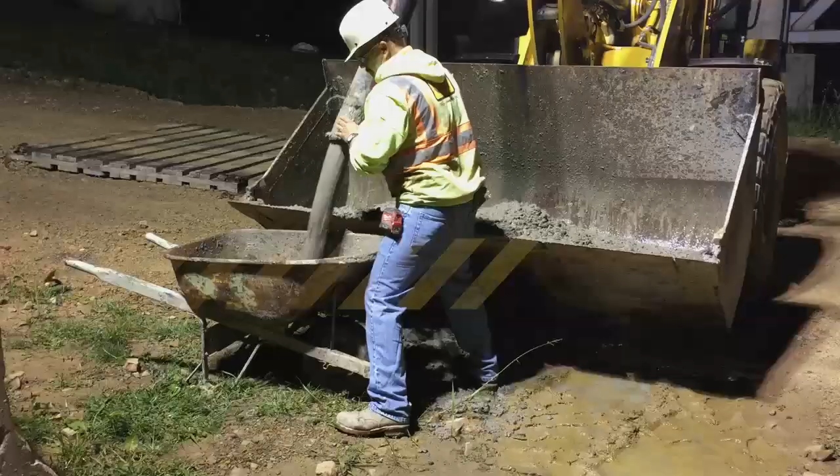The operations presented in this video are meant to be instructional to ensure quality construction. This video is not intended to provide a comprehensive overview of safety procedures. All parties should ensure that they are familiar with and follow all safety requirements, policies, and procedures that apply to their specific operation.

While many factors play a role in final bridge deck construction, this video training series will cover bridge deck placement with a pump and the initial concrete testing for Class AAAP concrete. We will begin after the bridge deck pre-placement activities have been completed.

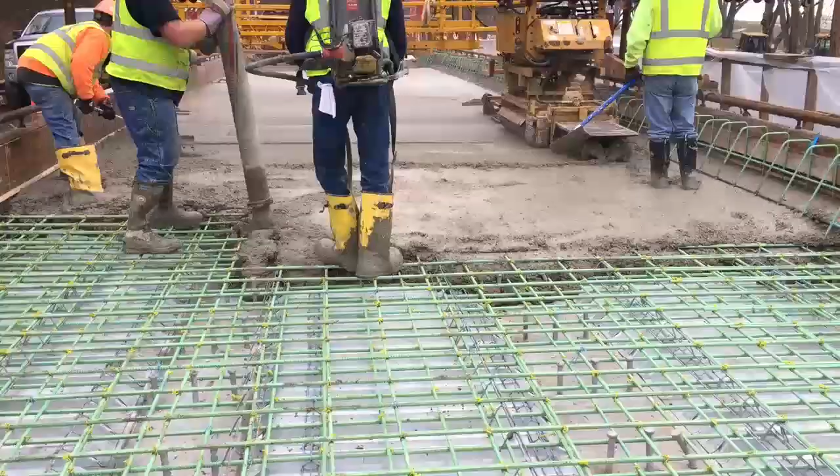This video is intended to provide some basic understanding of the items important during the construction of quality reinforced concrete bridge decks cast in place, with focus on the concrete testing for quality control and acceptance for bridge deck placement operations using the pump truck method type of placement.

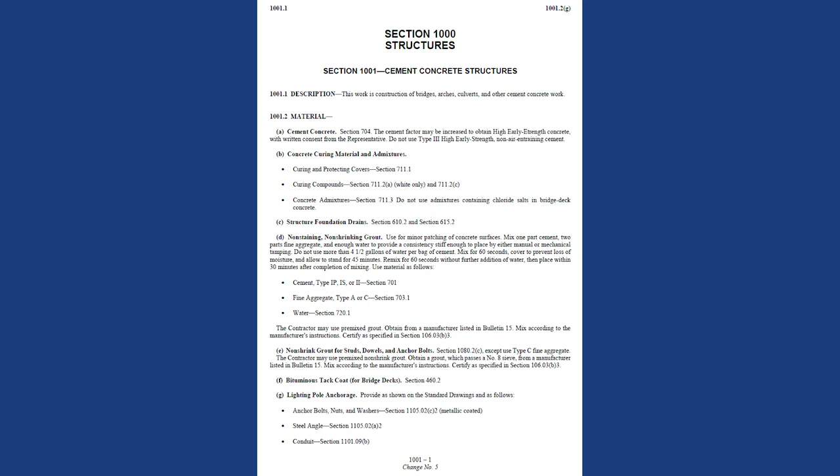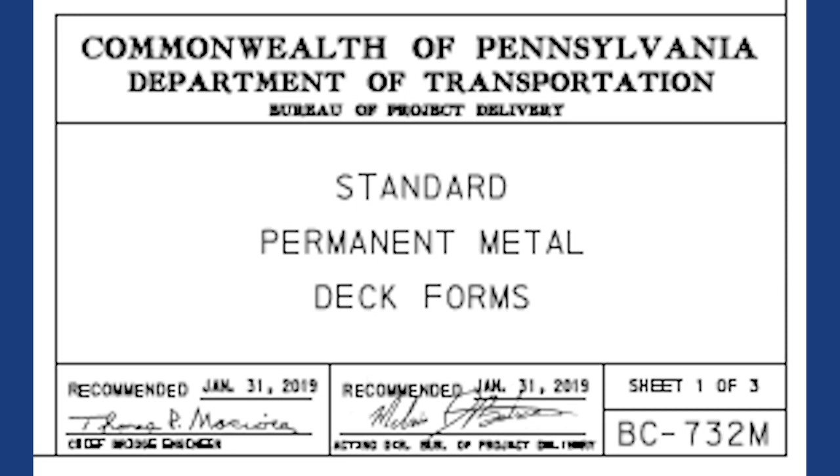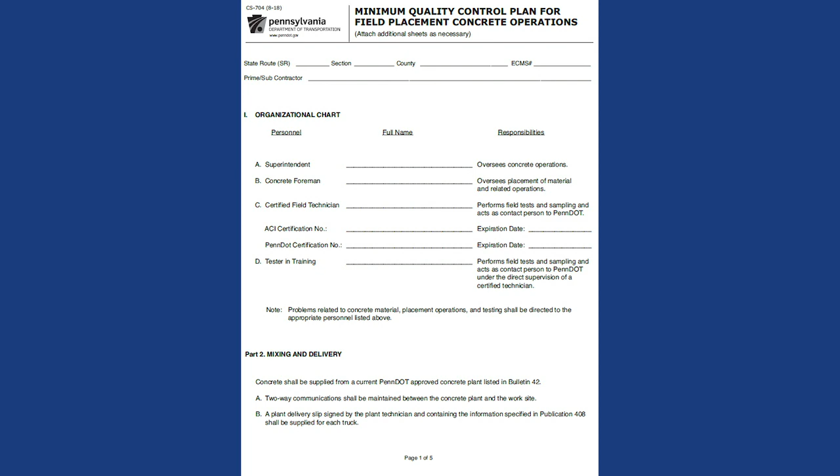The applicable documents needed for bridge deck construction testing and placement by the pump truck method are Publication 408, Section 1001, Cement Concrete Structures. Publication 408, Section 704, Cement Concrete. BC Standards 732M, Permanent Metal Deck Forms. BC Standards 752M, Concrete Deck Details. Approved Contract Structural Plans. Approved CS 704 Minimum Quality Control Plan for Field Placement Concrete Operations.

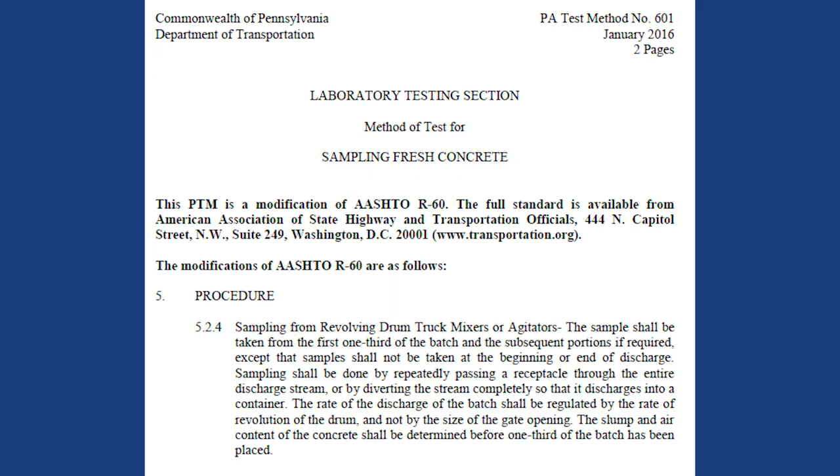Approved Bridge Deck Placement Plan. Approved Concrete Mix Design Class AAAP. PTM number 601, Obtaining Samples of Fresh Concrete. AASHTO T119 Slump Test. AASHTO T152 Air Content Test. ASTM C1064 Temperature Test. And Concrete Field Testing Technician Certification Training Manual.

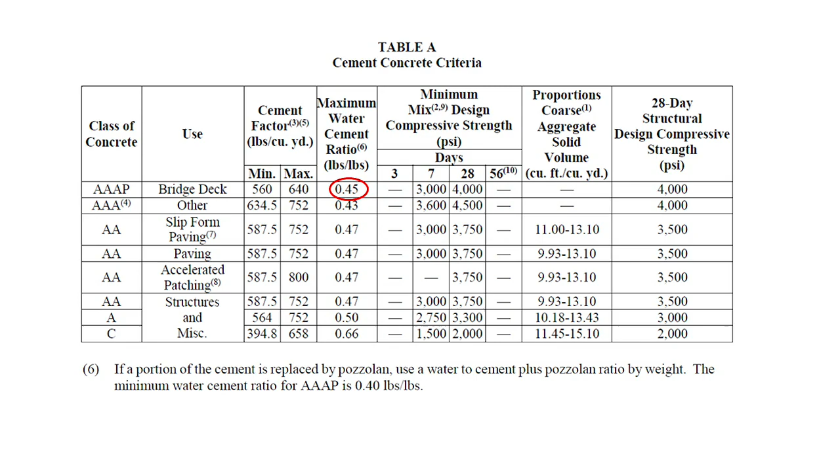The concrete type to be used for all bridge decks is Class AAAP. AAAP bridge deck concrete requires a 7-day minimum compressive strength of 3,000 psi and a minimum 28-day compressive strength of 4,000 psi. AAAP requires a minimum water-to-cement ratio of 0.40 pounds per pound and a maximum water-to-cement ratio of 0.45 pounds per pound. AAAP has a maximum upper slump limit of 5 inches.

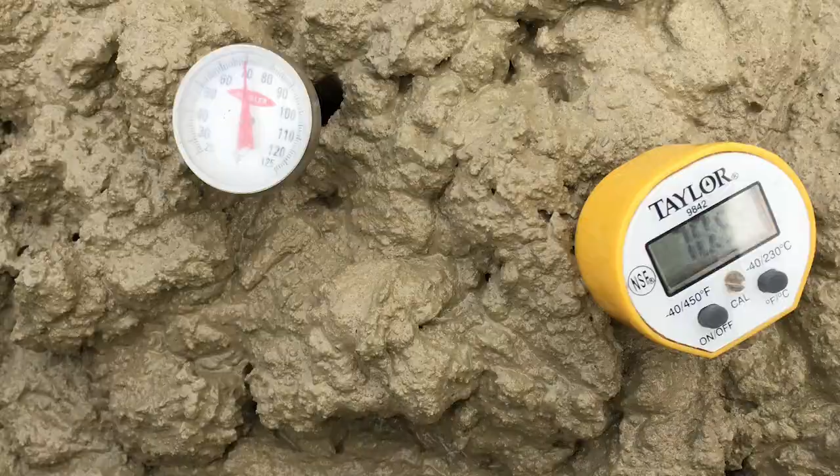The concrete temperature after mixing and prior to deck placement is to be between 50 degrees Fahrenheit and 80 degrees Fahrenheit. Special retarding and/or water-reducing admixtures are often used in the AAAP deck mix to control rapid drying of the concrete due to low humidity, wind, high ambient air temperature, and the concrete's set time to allow for proper finishing and curing. The following are the concrete test types that may be encountered for bridge decks.

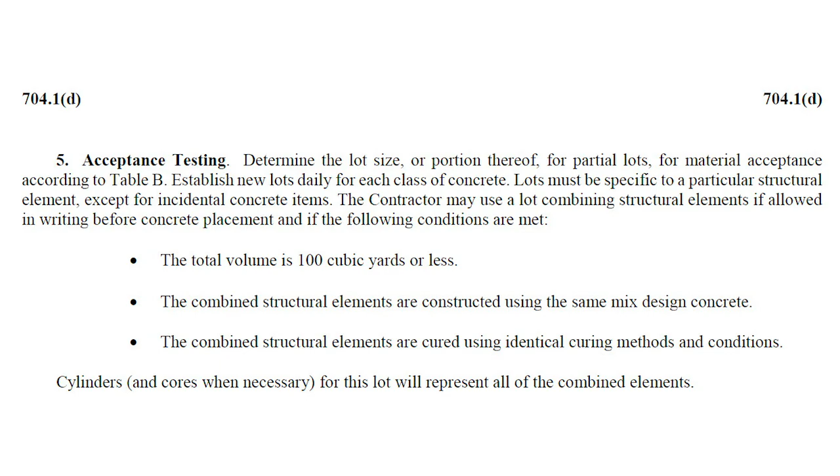Acceptance testing. The department's overall concrete acceptance process includes a combination of quality control, acceptance, verification, and quality assurance sampling and testing. Lot sizes are established by the department for the appropriate type of construction being performed as per Section 704, Table B of Publication 408. Acceptance samples will be obtained and tested by the contractor, witnessed by the department representative.

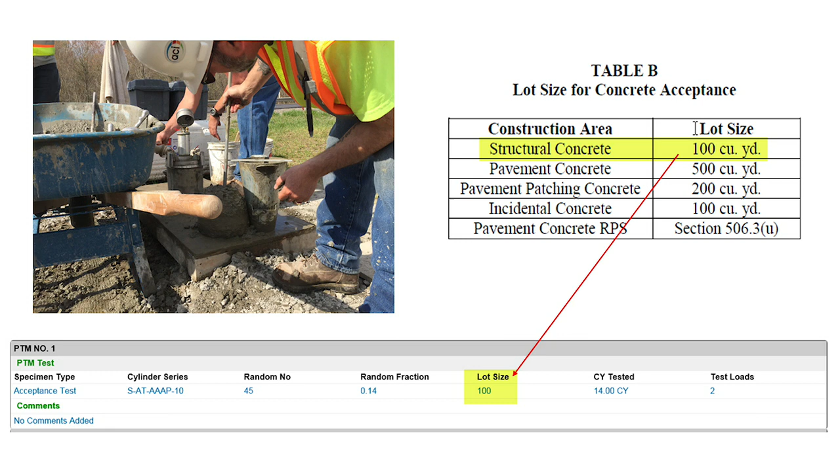For example, if a bridge deck is being placed, reference Table B, which indicates the construction area would be structural concrete requiring a 100 cubic yard lot size. These acceptance lots are established daily and do not continue from one day to the next. Quality control testing. To be performed by the contractor's concrete field testing technician for slump, air content, and temperature, as noted in the approved quality control plan and Publication 408, Section 704.1.

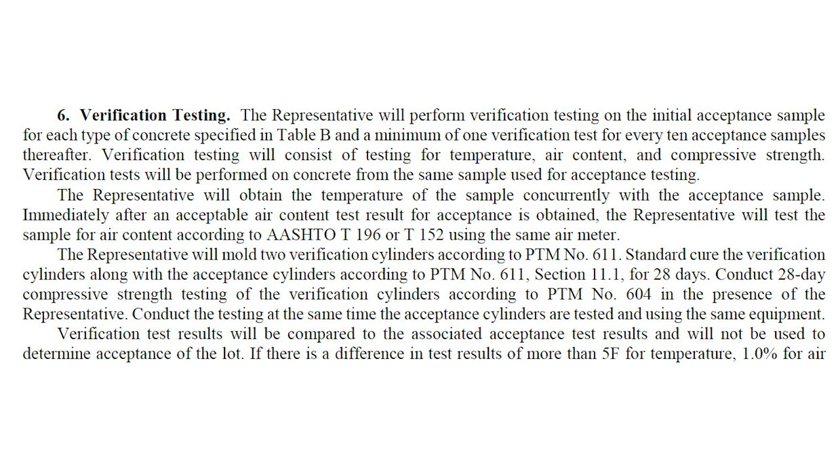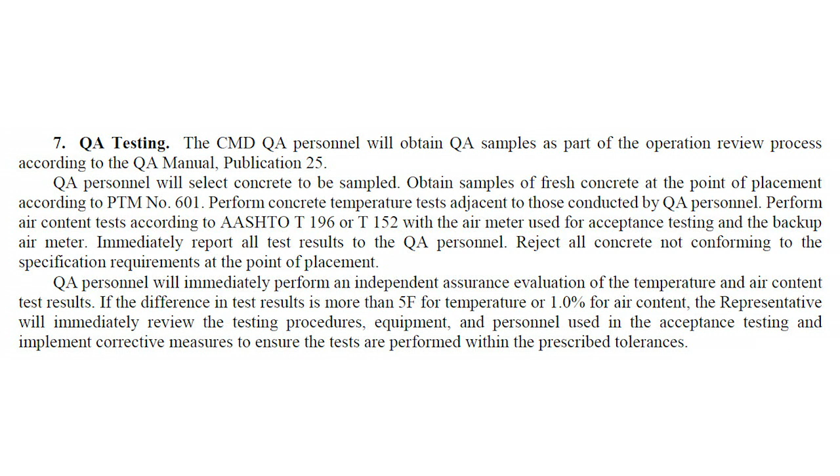Verification testing. To be performed by the department representative from the same sample of material obtained for the initial acceptance sample, which shall be tested for air content and temperature as per Section 704.1 of Publication 408. Quality assurance testing. When required, to be performed by the contractor's concrete field testing technician for slump, air content, temperature, and witnessed by QA representative as per Publication 408, Section 704.1.

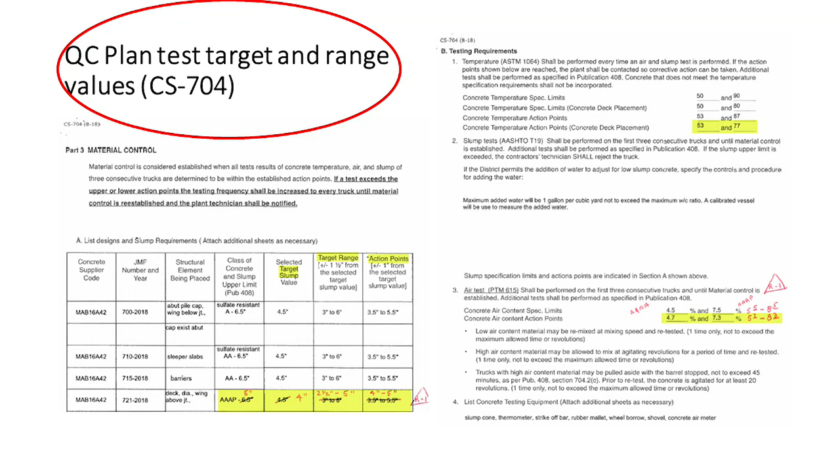A certified concrete field testing technician is required for the testing of concrete in the plastic and hardened state. The concrete field technician must be knowledgeable of the requirements of the department reviewed and approved quality control plan during the testing, and must be aware of the test target and range values for slump, temperature, and plastic air content of the Class AAAP mix being placed.

Quality control testing must be performed until material control for the AAAP is achieved. Material control is considered established when all test results of concrete temperature, air content, and slump of 3 consecutive trucks are determined to be within the established action points. Do not establish action points for slump at either the upper or lower specification limits.

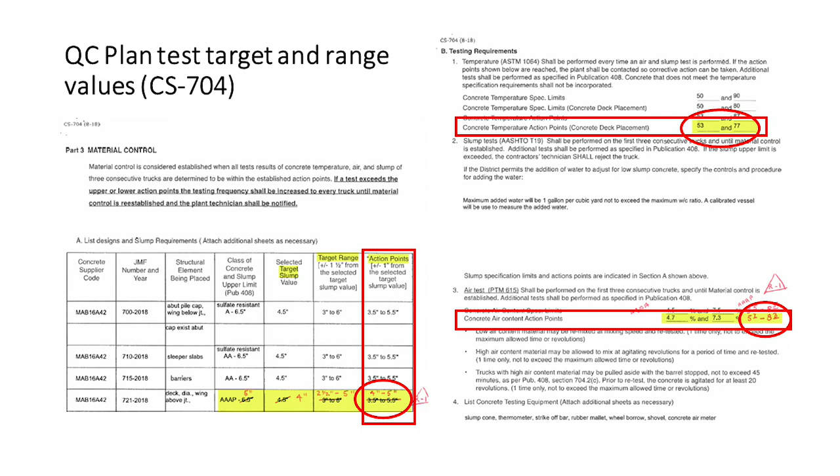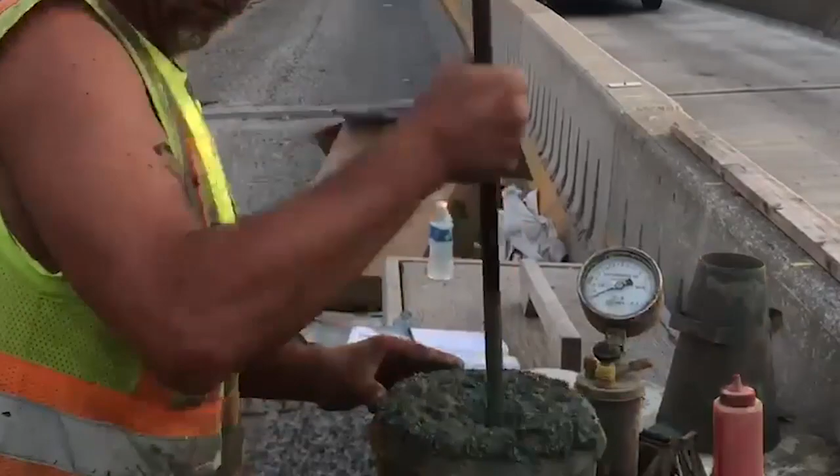If a quality control or acceptance test exceeds the upper or lower action points, the testing frequency shall be increased to every truck until material control is reestablished and the plant technician shall be notified. Perform sampling of the concrete Class AAAP mix in accordance with PTM number 601 of Publication 19, Obtaining Samples of Fresh Concrete. Sample to be obtained from the first 1/3 of the batch and subsequent points when required.

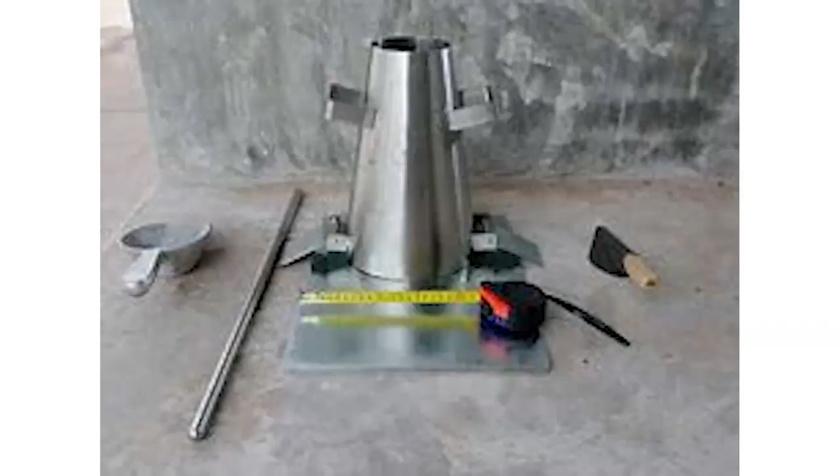Perform plastic air content testing in accordance with AASHTO T152. Perform slump testing in accordance with AASHTO T119. Perform temperature testing in accordance with ASTM C1064. The testing facilities and equipment are to be provided by the contractor or producer as outlined in Section 704.1 of Publication 408.

Slump test requirements for bridge decks. Perform slump testing in accordance with AASHTO T119 as follows. Concrete consistency at the time of deck placement is to be maintained within 1.5 inches of the selected target slump value noted on the approved quality control plan. If the upper slump limit of 5 inches for AAAP is exceeded on any slump test, the certified concrete field testing technician shall reject the concrete load.

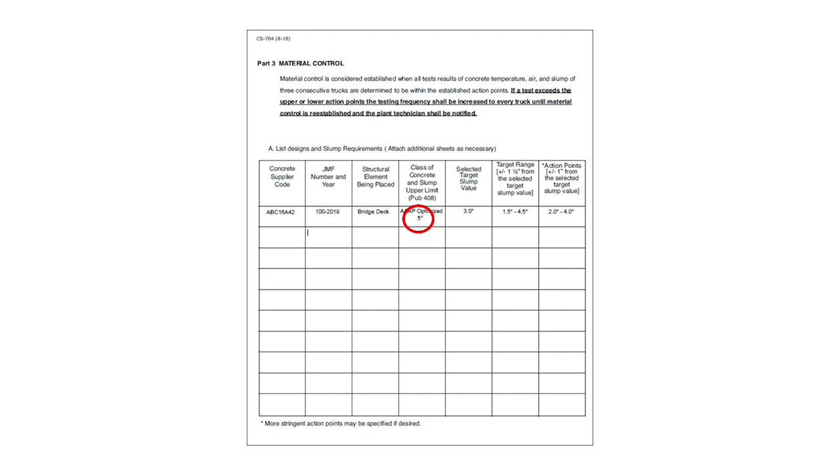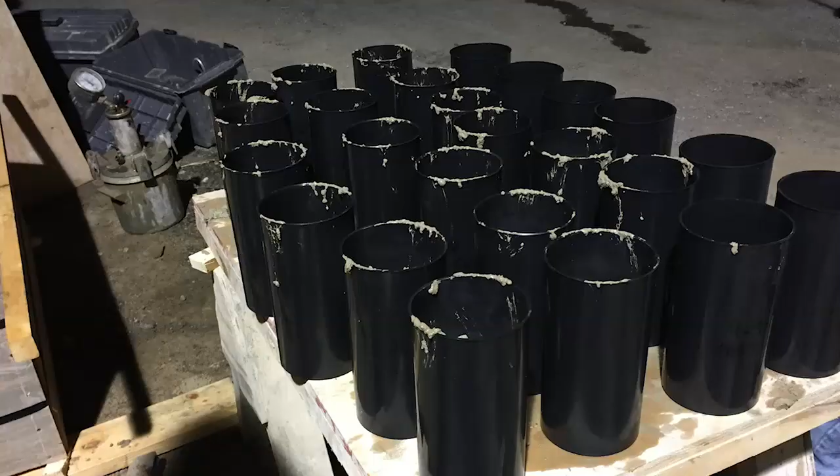If any slump test result falls outside the target range noted on the approved quality control plan, and has not exceeded the upper slump limit of 5 inches for AAAP, immediately perform the air content and temperature tests from the same sample. If the air content and concrete temperature tests are within the specified limits, the contractor may incorporate the material into the work, provided a full set of quality control and acceptance compressive cylinders are molded in addition to the cylinders made for the originally selected PTM number 1 acceptance sample location for compressive strength testing.

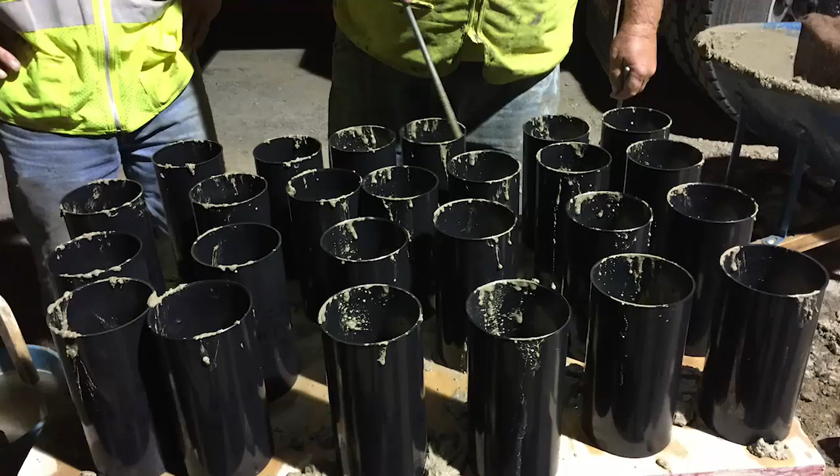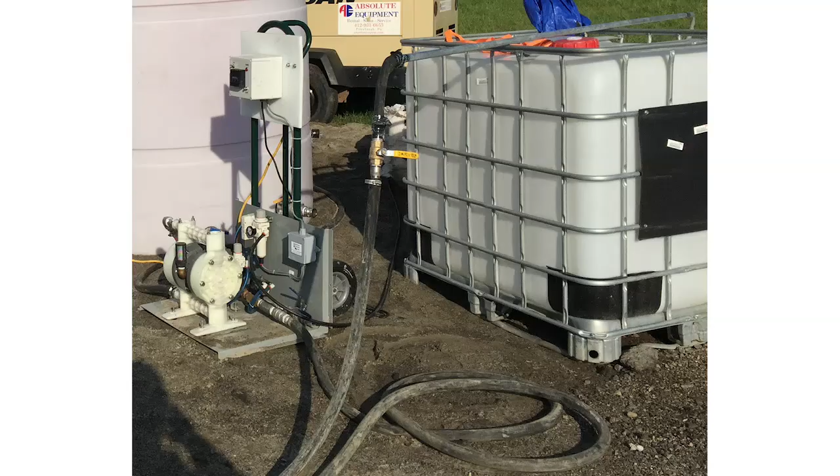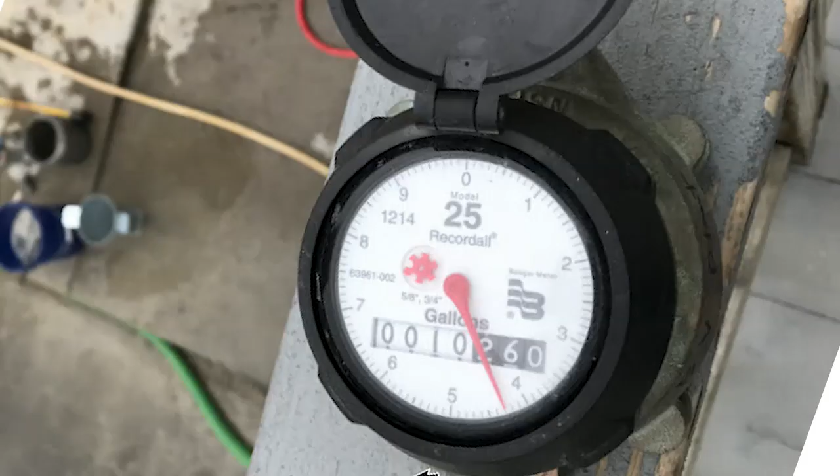If one or more truckloads of cement concrete exceed the slump target range, make additional quality control and acceptance cylinders from each load. Use the lowest compressive strength cylinder result for acceptance of the lot. The adjustment of slump may be allowed through the addition of additional water reducer admixture at the job site, provided a comprehensive procedure detailed in the quality control plan has been submitted and approved for this purpose. The addition of water to adjust for slump, when permitted, must be from a metered system.

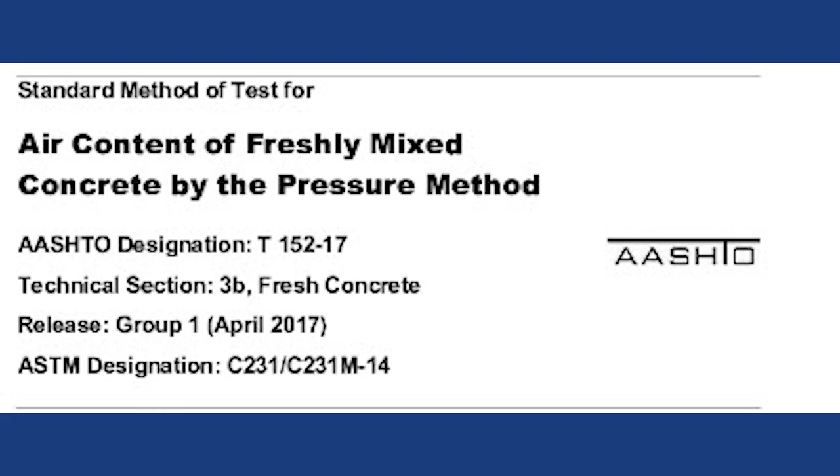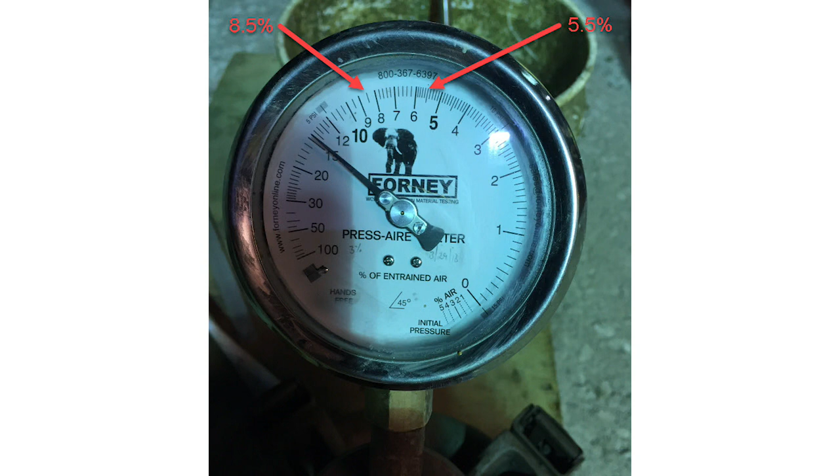Air content testing for bridge decks. Perform plastic air content testing in accordance with AASHTO T152 and as follows. AAAP concrete mixes are to have a plastic air content of 7.0% plus or minus 1.5%, which is a range of 5.5% to 8.5%. 2 sets of calibrated air meters are to be available at each concrete placement on the project, with 1 set as a backup.

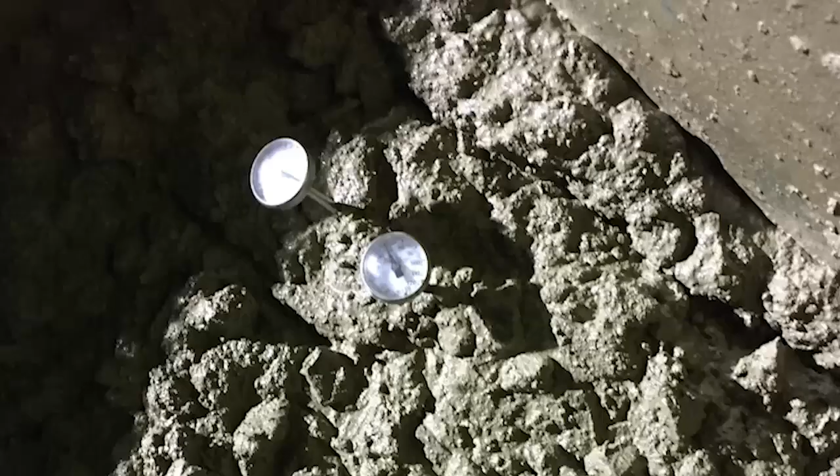Concrete temperature testing for bridge decks. Perform temperature testing in accordance with ASTM C1064 and as follows. The plastic AAAP concrete temperature for bridge deck placement must be between 50 degrees Fahrenheit and 80 degrees Fahrenheit. Have a minimum of 2 concrete thermometers available for use during temperature testing.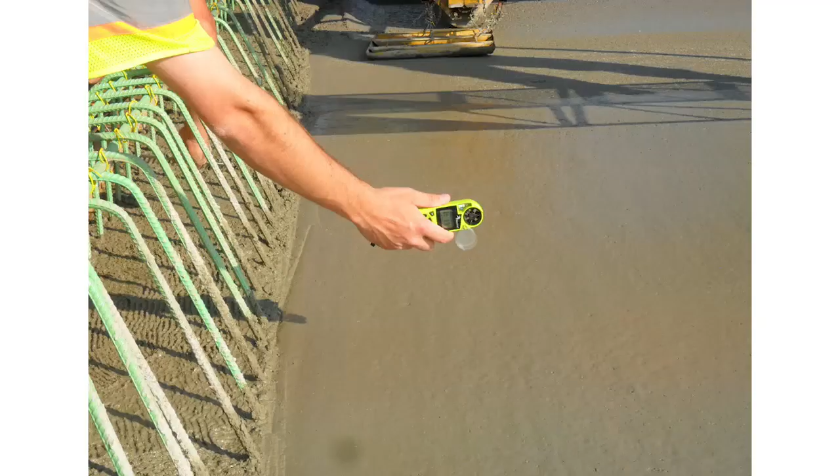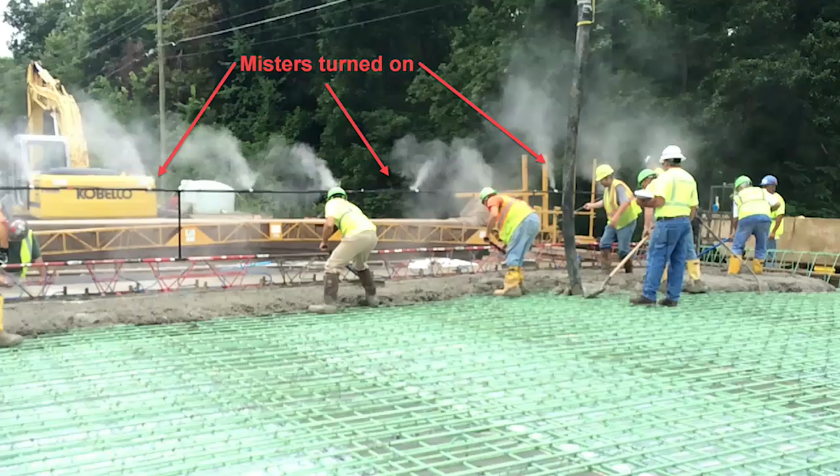Evaporation rates for bridge decks, as per Publication 408, Section 1001.3. Do not exceed an evaporation rate of 0.06 pounds per square foot per hour before starting the deck placement and every hour during the placement. If the evaporation rate value is exceeded, stop the concrete deck placement until protective measures are taken to reduce values to an acceptable level.

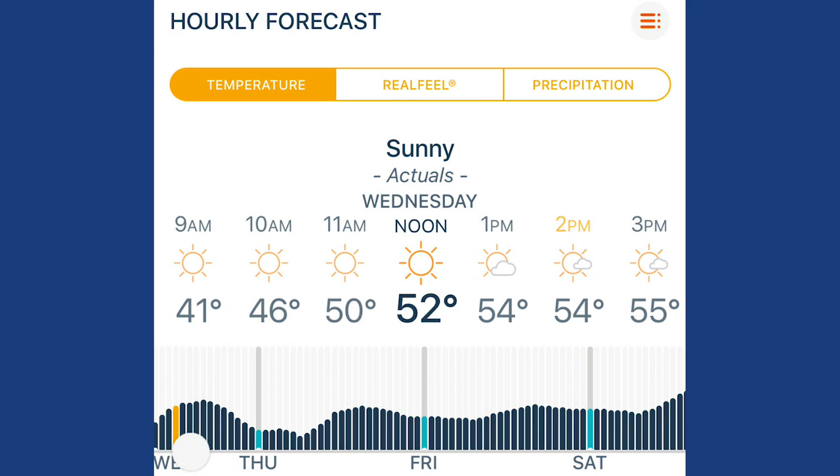Ambient conditions during bridge deck placement, as per Publication 408, Section 1001.3. Do not proceed with mixing and placement operations if the forecasted ambient temperature is expected to reach 80 degrees Fahrenheit within the scheduled placement time, or if the evaporation rate will exceed 0.06 pounds per square foot per hour. Unless otherwise authorized in writing by the department, do not start the deck placement operation until the ambient air temperature is a minimum of 40 degrees Fahrenheit and rising, and is predicted to stay above 40 degrees Fahrenheit throughout the entire deck placement operation.

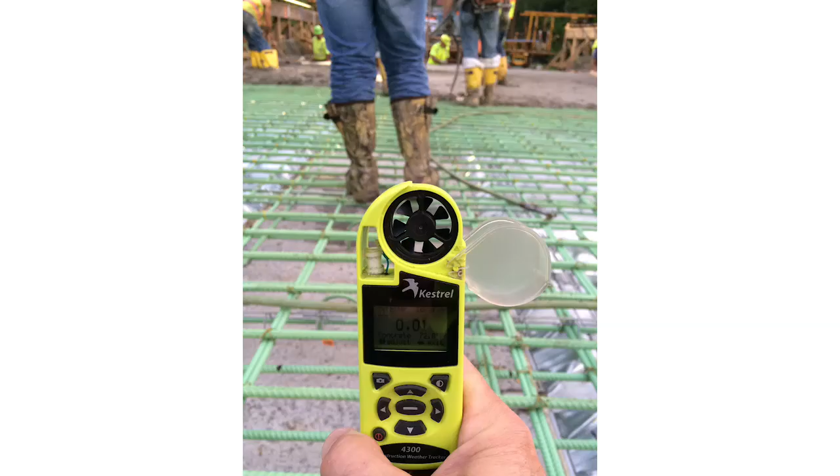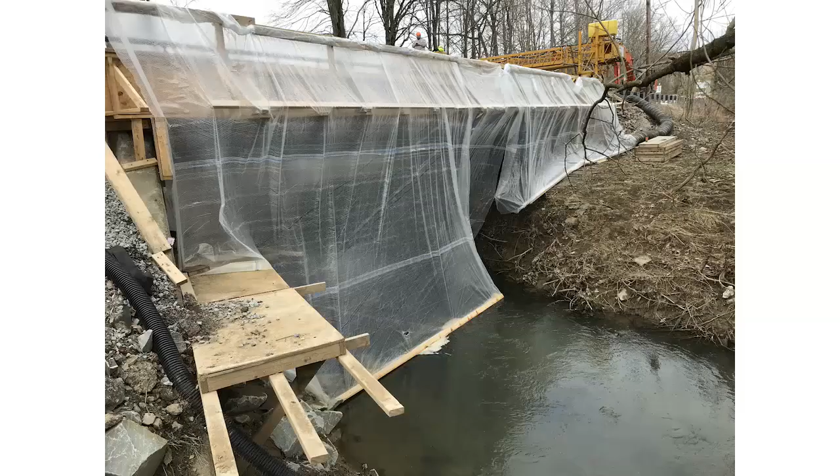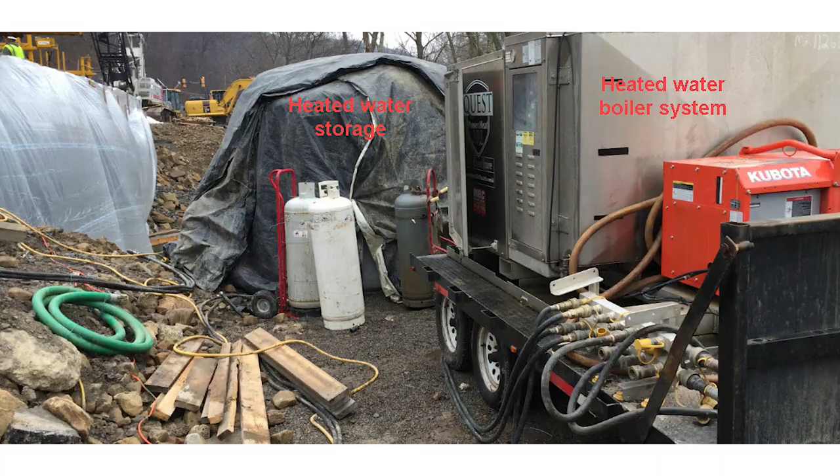Do not exceed the evaporation rate of 0.06 pounds per square foot per hour prior to and during the bridge deck concrete placement operation. Cool weather is defined in Publication 408 as when concrete is placed at an air temperature below 50 degrees Fahrenheit but above 35 degrees Fahrenheit. Cold weather is defined in Publication 408 as when concrete is placed at an air temperature below 35 degrees Fahrenheit. It is important here to be aware of the forecasted weather on the date of the scheduled deck placement, as this will be a deciding factor on proceeding with the placement or postponing or canceling for another day.

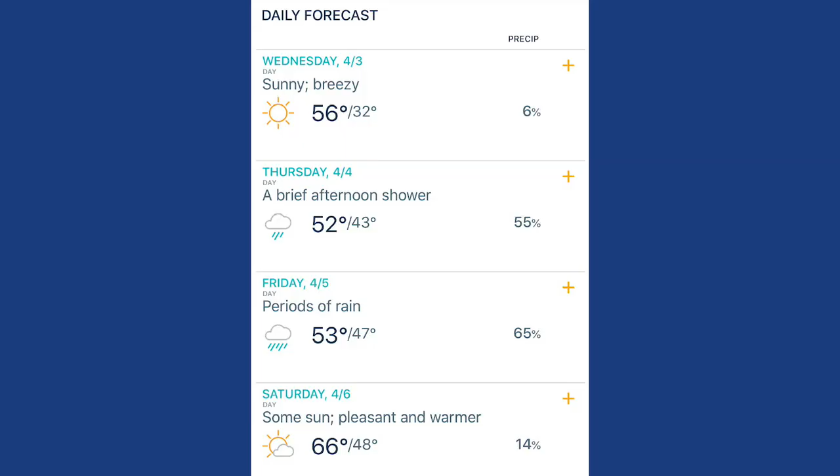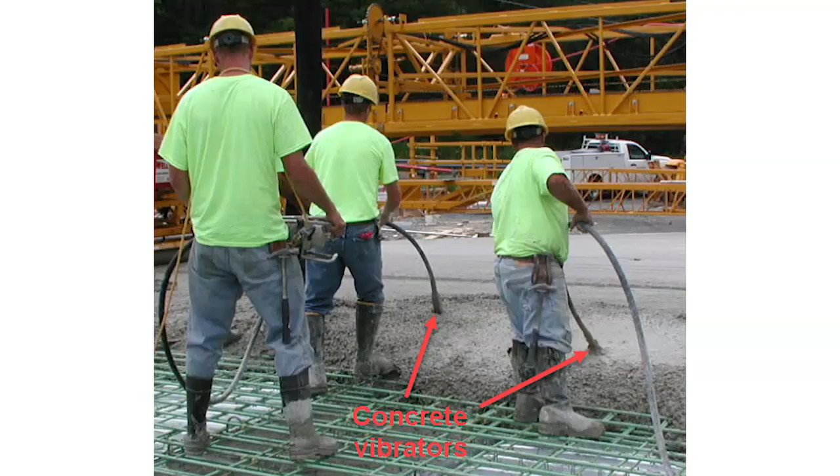Equipment used for concrete bridge deck placement. Concrete placement equipment may include or combine either a pump truck, crane, and bucket, or conveyors, such as a telebelt, to place the Class AAAP concrete deck mix that has been delivered from the concrete supplier delivery trucks. Concrete vibrators are important for proper consolidation of the AAAP concrete around the reinforcement steel and formwork during placement, and should take place ahead of the Bidwell finishing machine.

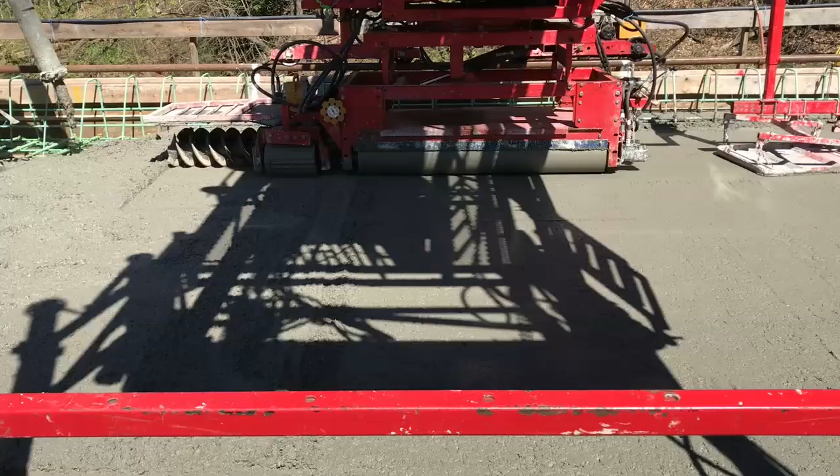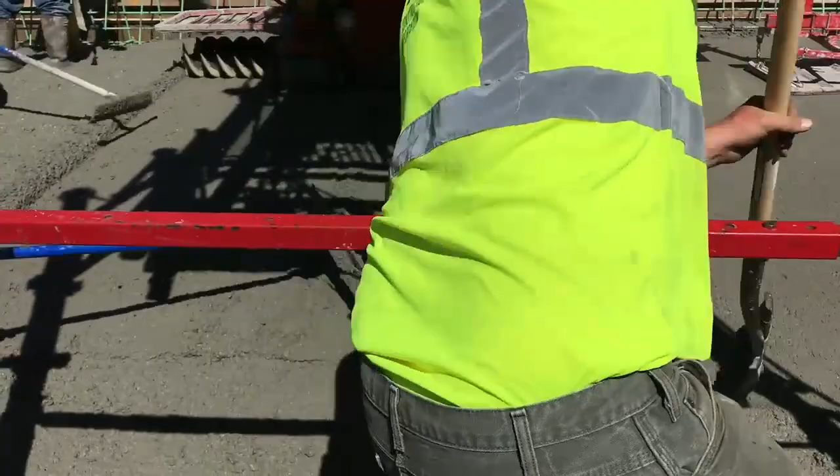A concrete Bidwell finishing machine is most widely used for most bridge deck placements. It is used for the initial concrete strike-off and consolidation of the as-placed concrete and for final design grade control of the plan deck elevation grades. The use of a Bidwell machine must include a backup machine and/or motor and spare parts in case of breakdown. A water fogging system is required in case of evaporation rates being exceeded during the deck placement.

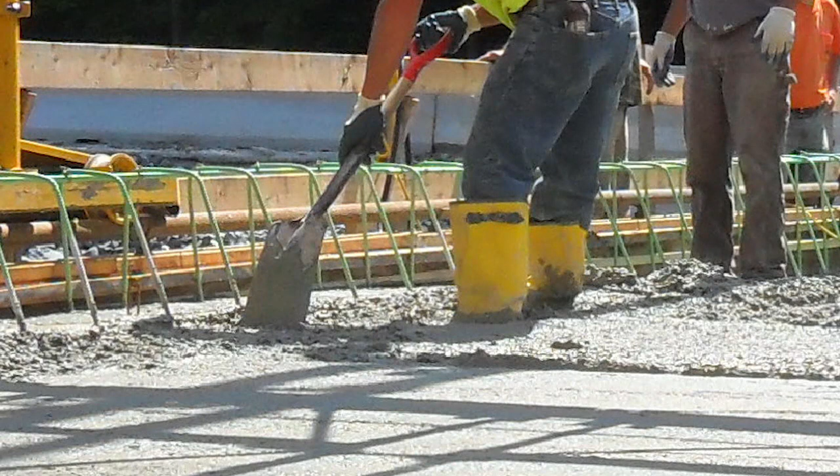Evaporation rate monitoring device used to monitor the evaporation rate conditions prior to and during the deck placement operations. Various hand tools, such as concrete lutes and shovels, water hoses for pre-wetting the deck ahead of concrete placement, power tools, generators, compressors, including backup equipment when required, and other miscellaneous tools and materials may be used during a deck placement operation.

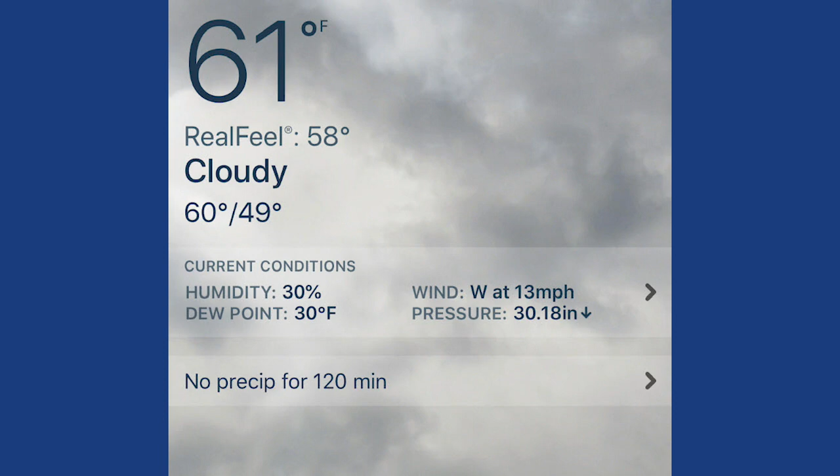The following is an example of the processes involved during the initial stages of a concrete bridge deck testing and placement. We will assume here that concrete Class AAAP will be placed for a bridge deck with a pump truck. The pump truck will be set up at abutment 1, at approximately the same grade elevation as the constructed bridge deck. The total estimated quantity of AAAP to be placed will be 80 cubic yards. The current weather forecast and ambient temperatures have been checked and approved to proceed.

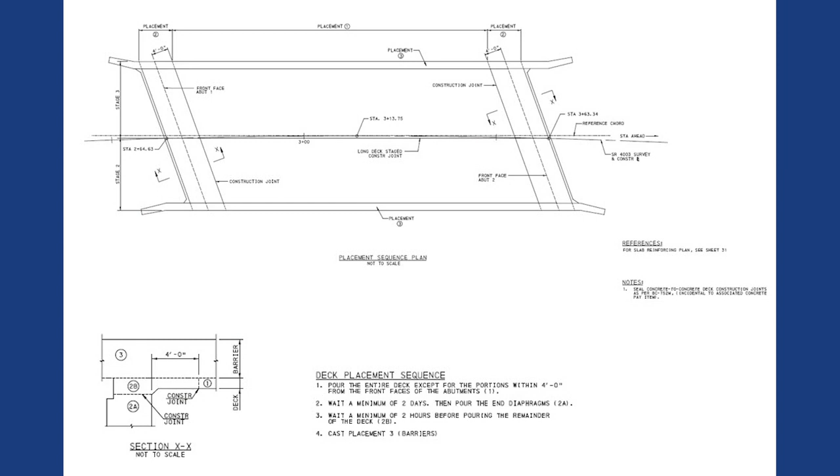The first delivered concrete load of 10 cubic yards has just arrived on site. The pump placement will commence from abutment 2 side toward abutment 1, as indicated on the contract bridge deck placement sequence plans. Acceptance concrete lot number 1 was calculated to be on cubic yard 45, which would be on delivered load number 5. Proceed with concrete testing for pump placement load 1 as follows.

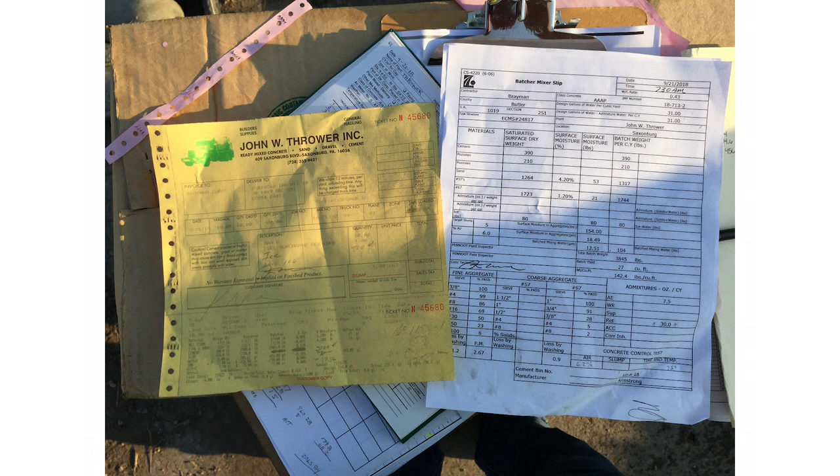Collect the truck delivery slip and batcher mixer slip, and reference the approved AAAP concrete mix design matches what is being delivered, i.e. supplier code, job mix formula, material class. Immediately calculate to verify the water-cement ratio of the delivered concrete mix meets mix design, and the minimum and maximum water-cement values for AAAP as delivered. The initial sample location for quality control and acceptance sampling for a pump truck placement will be determined daily on the first load of concrete and then for every 200 cubic yards thereafter.

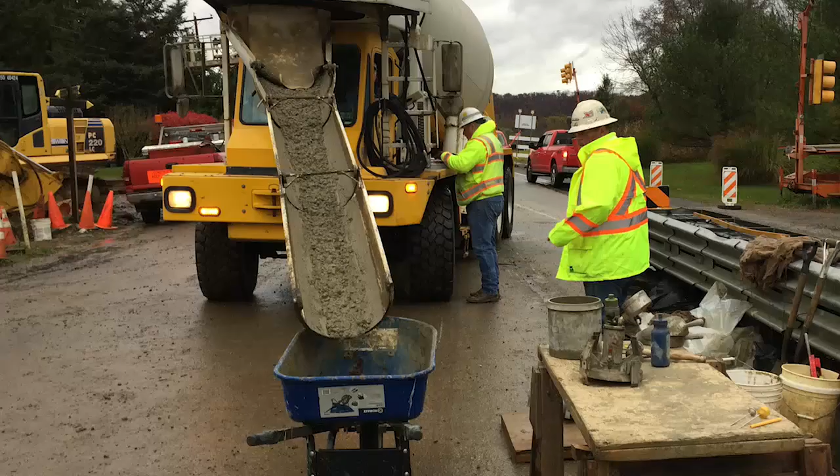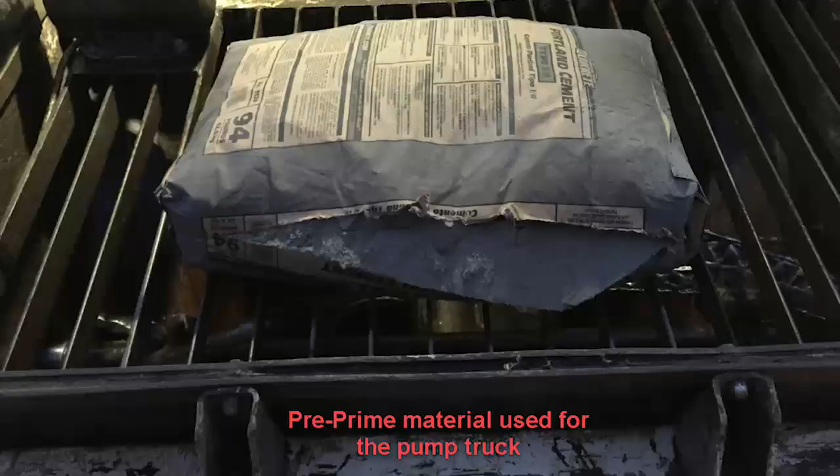Obtain the concrete sample for testing from the first delivery truck as per PTM 601. Test the concrete for temperature, slump, and air content. Record these results. Tests must meet specification requirements. Immediately obtain an initial evaporation rate reading from on the bridge deck. Record these results. Prime the pump accordingly. Then discharge waste of the remaining prime material from the pump at a designated area prior to obtaining the concrete sample for testing.

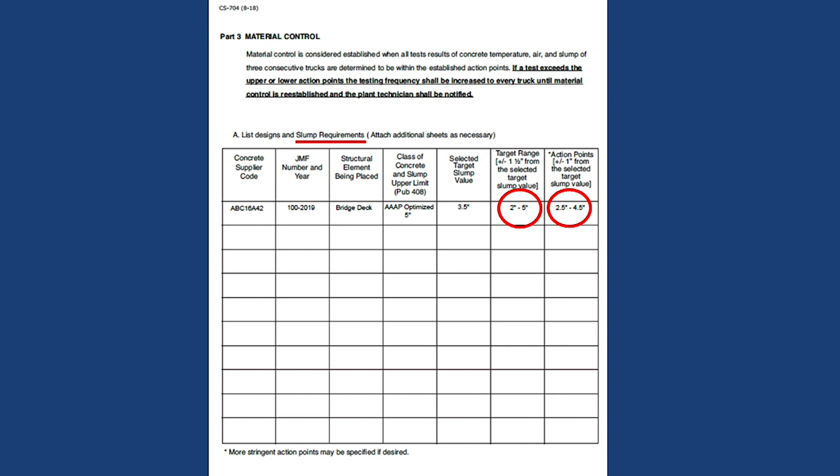Position the pump at the most severe boom configuration, vertical or horizontal, that will be encountered during the deck placement. Test the concrete for temperature, slump, and air content. Record these results. Tests must meet tolerance requirements. Confirm the concrete testing result values for slump, air content, and temperature are within the required specification ranges and action points, as noted within the approved quality control plan.

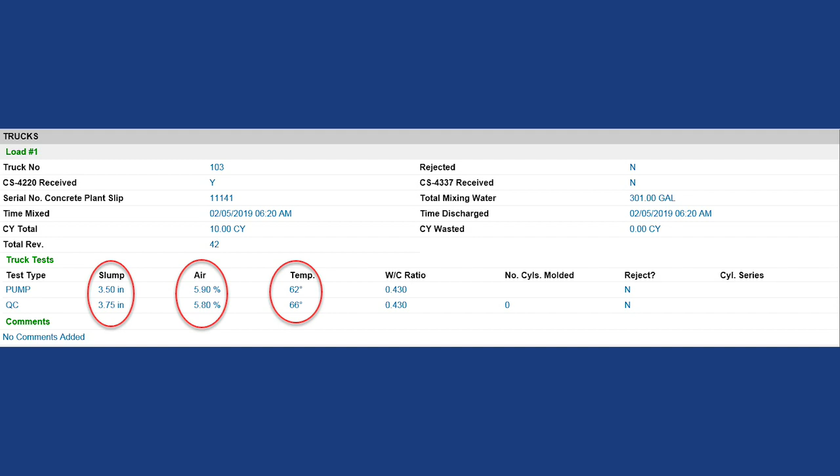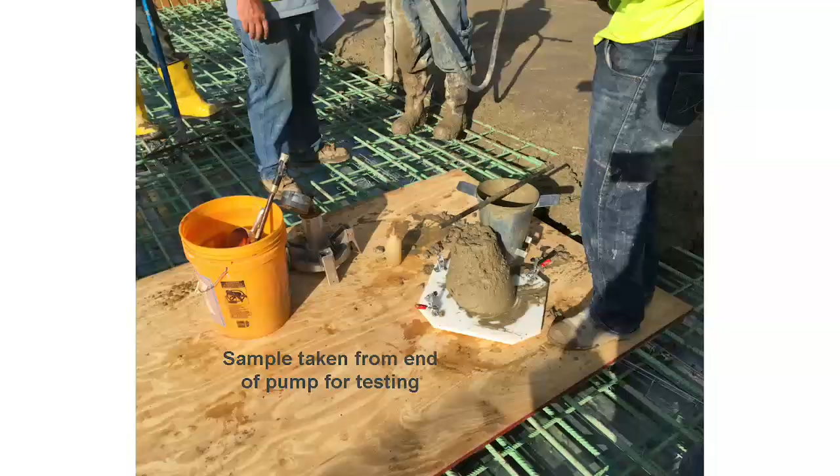Immediately compare the recorded slump and air content values from the load number 1 delivery truck tests and the pump tests. If the test results for air content are within 1% of each other and the slump results are within 1 inch of each other, the remaining quality control and acceptance testing can be completed prior to placement into the pump at the delivery truck discharge. If the slump and air content values do not meet, then acceptance testing will be performed at the discharge end of the pump discharge. Continue with the quality control acceptance testing of the delivered concrete until material control of the AAAP is established.

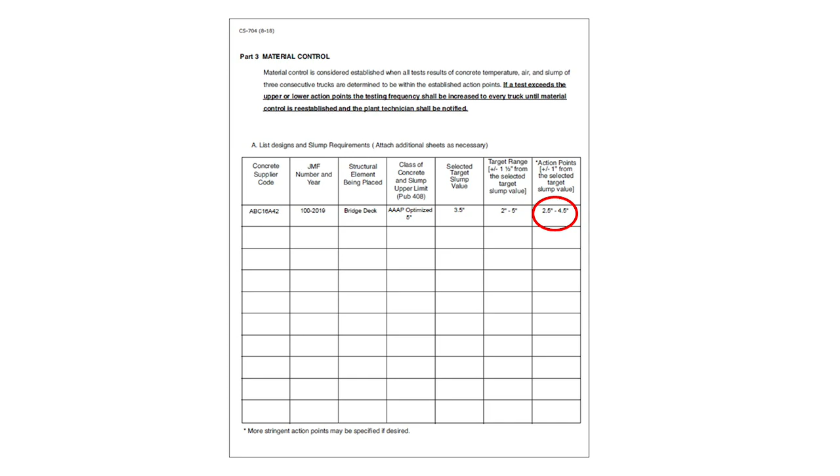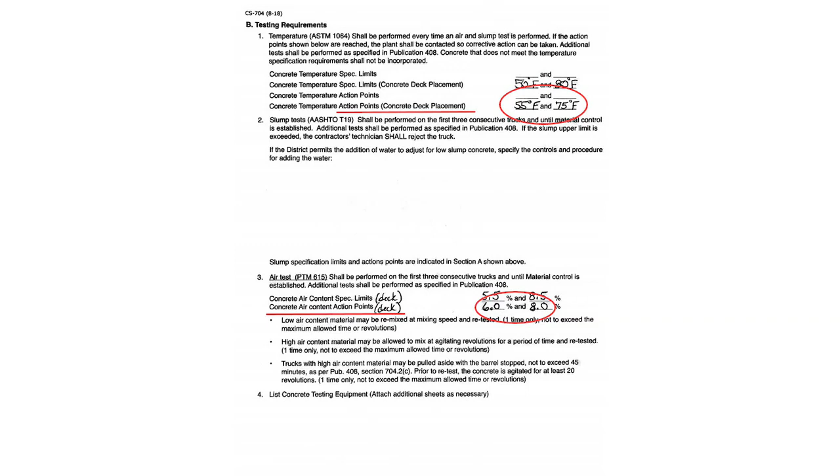Quality control, or QC testing, is required on the first 3 consecutive concrete delivery loads for material control, regardless of the method for placement. Material control is considered established when the test results of the first 3 loads are within established action points for air content, slump, and temperature. Once this is established, the frequency of testing may be reduced to a minimum of 1 quality control test per 50 cubic yards.

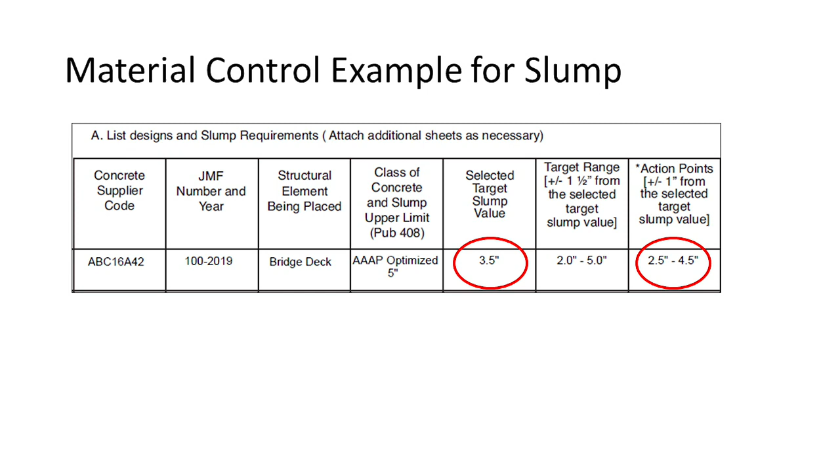Material control example for slump. The selected target slump noted above in this QC plan is 3.5 inches. Take note of the required action points. Truckload number 1 has a slump test result of 4 inches. Truckload number 2 has a slump test result of 4.5 inches. Truckload number 3 has a slump test result of 4 3/4 inches. Has material control been established, and can the frequency of testing be reduced to once every 50 cubic yards? No. The third QC test exceeds the upper action point of 4.5 inches, so the QC testing frequency will be increased to every truckload until material control has been established.

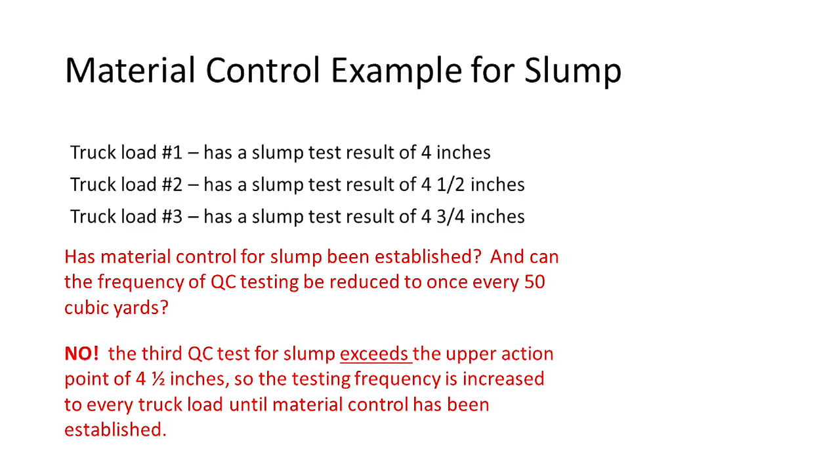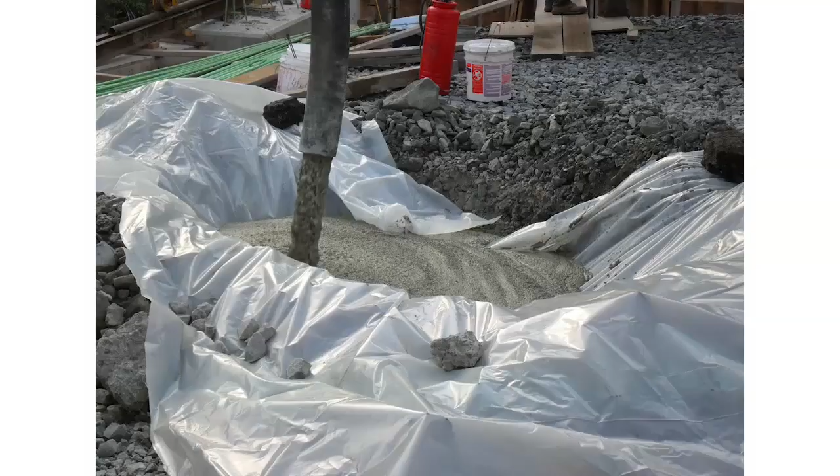Note: all 3 QC concrete tests, slump, air content, and temperature, need to be within their individual established action points for the first 3 consecutive delivery loads for the concrete mix to be considered having material control established. If either one of the 3 tests fall outside of the individual action points, the QC testing frequency will be increased to every truckload until material control is established.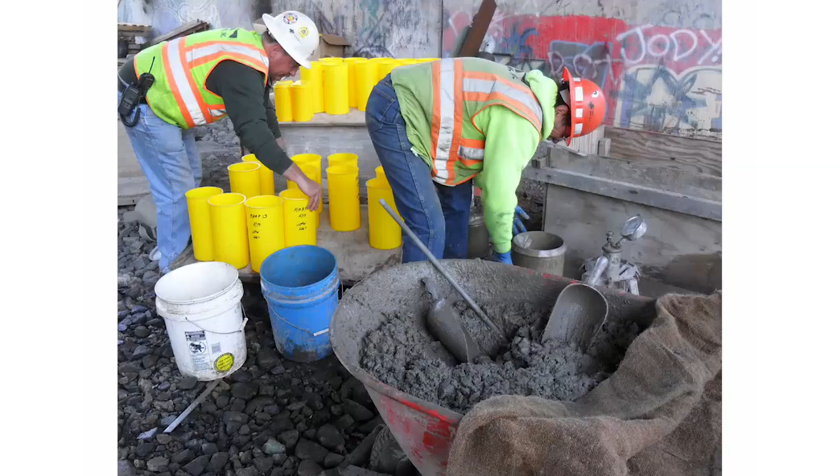Continue with concrete testing and sampling as per the approved quality control plan throughout the pump placement. At this point, let's assume that the concrete testing for slump, air content, and temperature has met all test requirements, and the pump correlation test on the first load for air and slump was met.

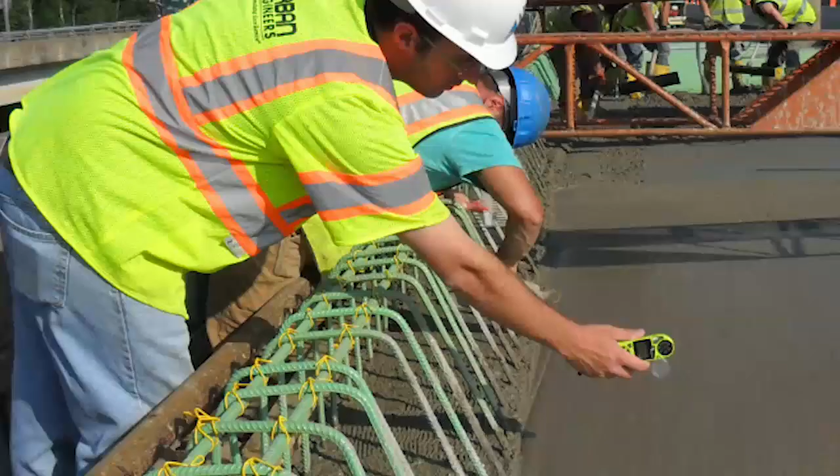The next step would be to proceed with the AAAP concrete placement from the pump discharge onto the prepared bridge deck. Determine the evaporation rate prior to placement, and then continue monitoring the evaporation rate every hour during the deck placement. Document the results. Do not exceed 0.06 pounds per square foot per hour. If required, pre-wet the bridge deck ahead of the placement.

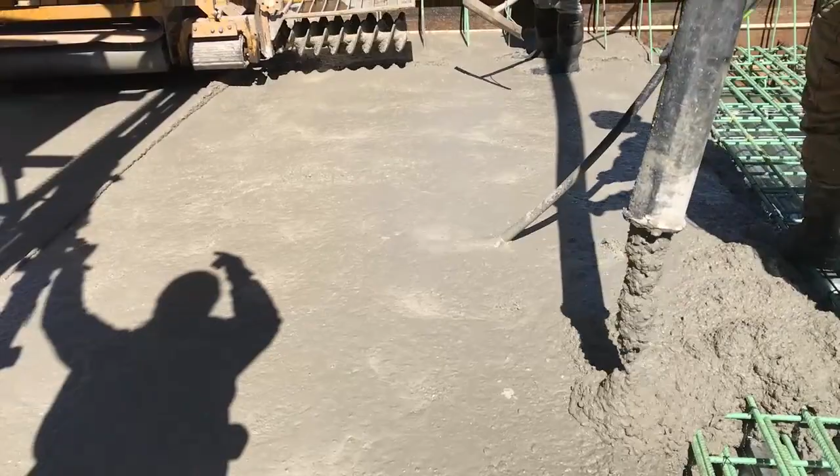From pump discharge, do not drop the concrete mixture vertically a distance greater than 5 feet, or discharge concrete near side laps or at a midspan of the stay-in-place corrugated sheet forms to a depth greater than 10 inches above the top of the stay-in-place deck pans. And do not discharge concrete in a manner that causes excessive concentrated loads.

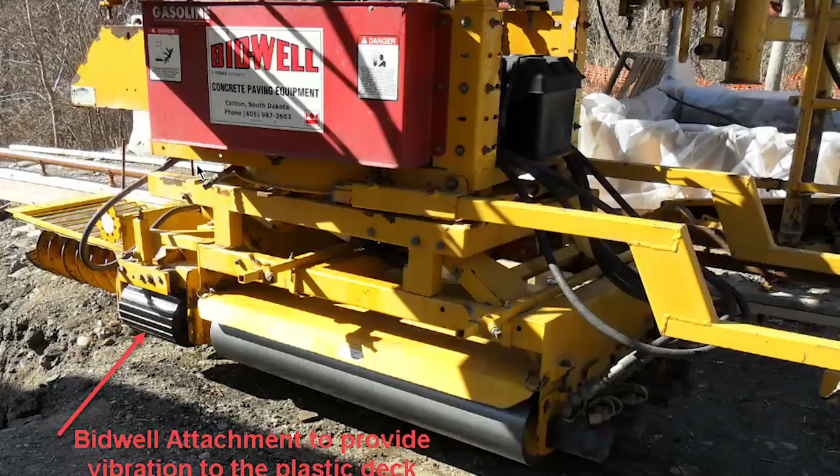Use vibrators to vibrate the plastic concrete on the deck to prevent voids, especially at construction joints, expansion joints, valleys, and end of the form sheets. Close any boot prints in the plastic concrete as the placement progresses. Use a motorized mechanical finishing machine, such as a Bidwell capable of applying initial vibration to the plastic deck surface, using a separate attachment, RotoVibe, from the machine manufacturer or by other means approved by the department.

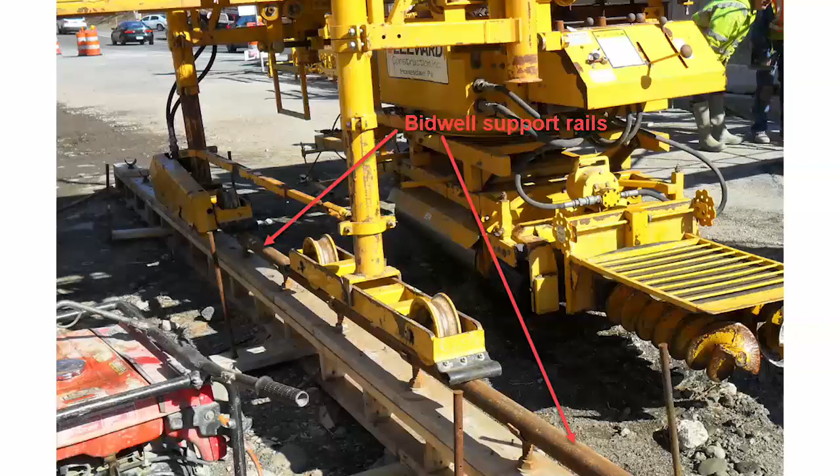The Bidwell should be large enough to finish the full width of the deck as constructed, placed onto temporary rails, supported on non-deflecting forms or other horizontal structure devices, set to proposed deck grades. Fix supports as needed during the deck placement, at intervals to limit deflection, to not more than 1/8 inch in 10 feet. Use supports that are removable to at least 2 inches below the deck concrete surface with minimum disturbance of the concrete.

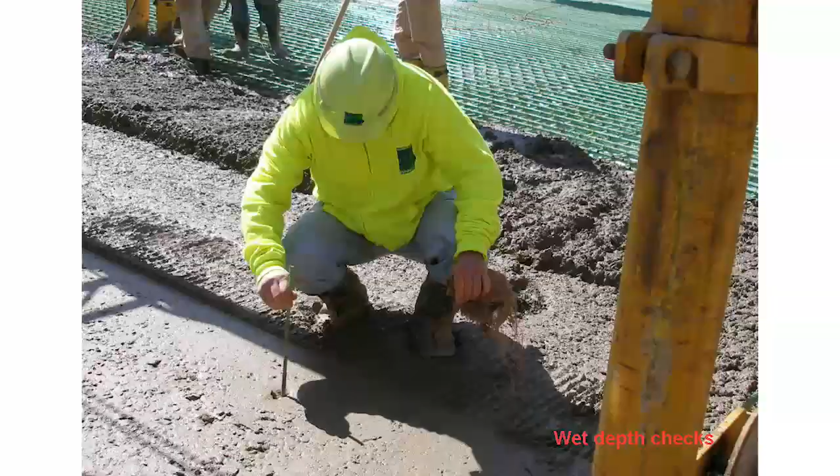Place the concrete at a minimum rate of 20 linear feet of deck per hour in a longitudinal direction. Place concrete no greater than 5 feet ahead of the Bidwell, unless the concrete will be finished within 15 minutes. Perform wet depth concrete checks during the deck placement and compare the measurements to the previously performed dry run depth checks and note any deficiencies immediately.

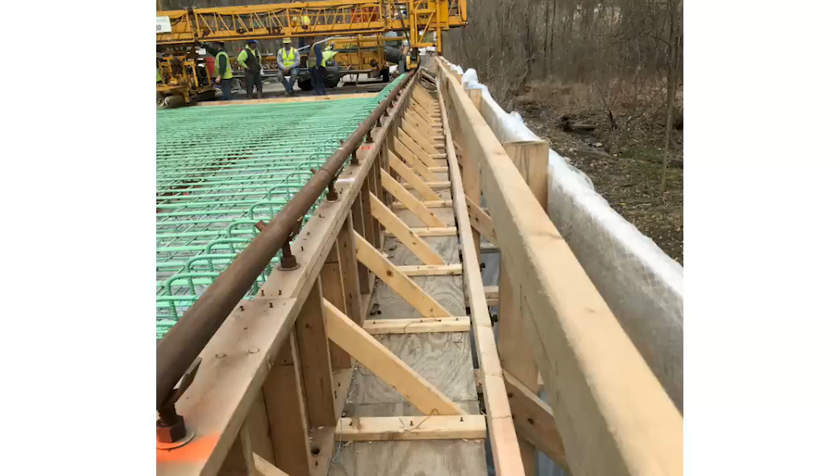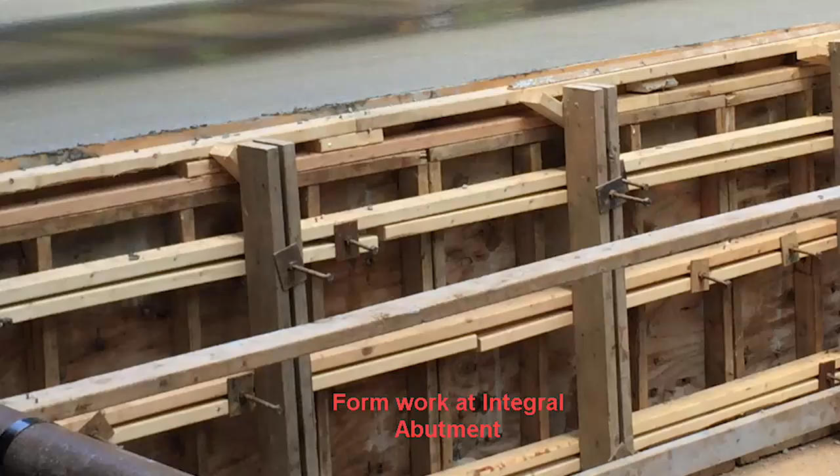Continuously check the falsework or supporting beams so the concrete as placed meets the lines and grades indicated on the plan. Keep wedges, forms, and blocking tight during placement of the concrete. Correct any deficiencies immediately. When applicable, adjust the bridge deck openings at the expansion joints and at expansion dams at the time concrete is placed to provide the openings indicated at 68 degrees Fahrenheit under full dead load.

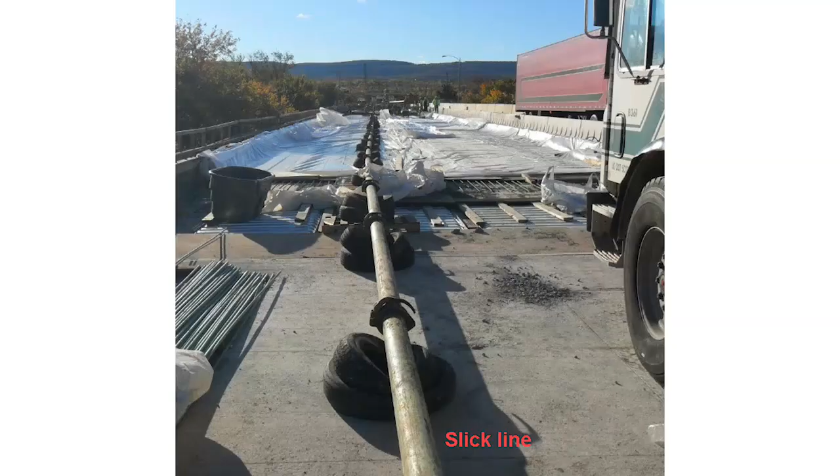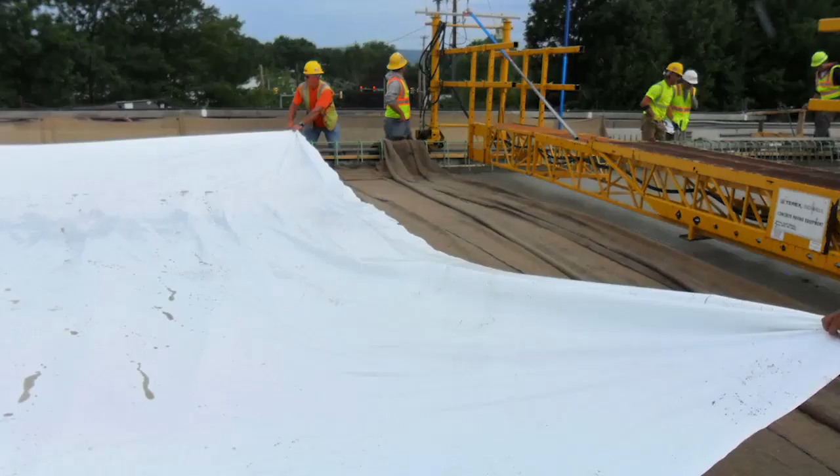Do not allow truck mixers, agitators, or other heavy motorized equipment on the deck spans in which concrete is being placed. The contractor is to provide and have ready enough materials at the worksite during the concrete deck placement to protect the bridge deck concrete against rain before initial set. If rainfall begins, stop placement operations and immediately cover the concrete with protective materials, and if necessary, stop operations due to weather or operational conditions. Provide bulkheads at the worksite and place them as directed.

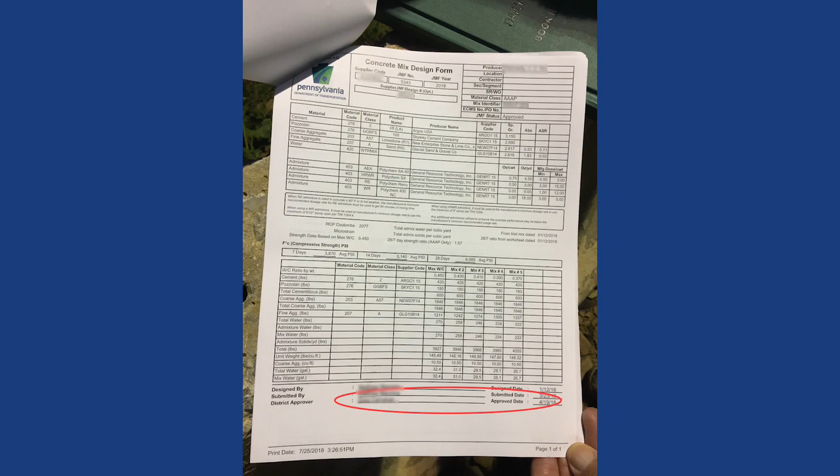Some final points to remember concerning this video series. Material. A concrete mix design AAAP has been reviewed and approved for use by the district representative and is on file at the project. Equipment. The method of concrete placement, pump, crane and bucket, or conveyor. Finishing machine type, and any proposed remediation equipment or materials that should be in place. Sequence of deck placement and procedure. The contractor's QC plan for the deck placement should be reviewed and approved prior to work starting.

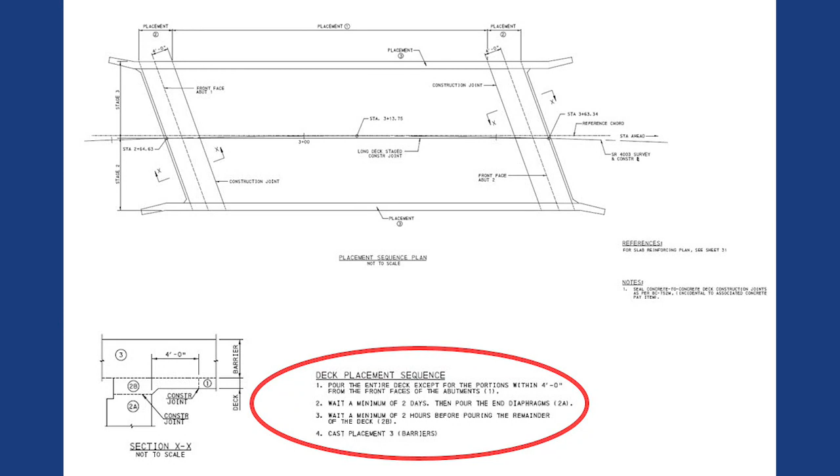Concrete testing. The QC plan for concrete testing and acceptance has been reviewed and approved and is on file at the project. Testing frequency for QC, acceptance, and verification has been discussed, along with the required ranges and action points for slump, air content, and temperature. Concrete technician certifications are current. If placement is by pump, witness the correlation testing required as per Publication 408, Section 1001.3, to determine the sampling locations, i.e. at the back of the truck or at the point of placement.